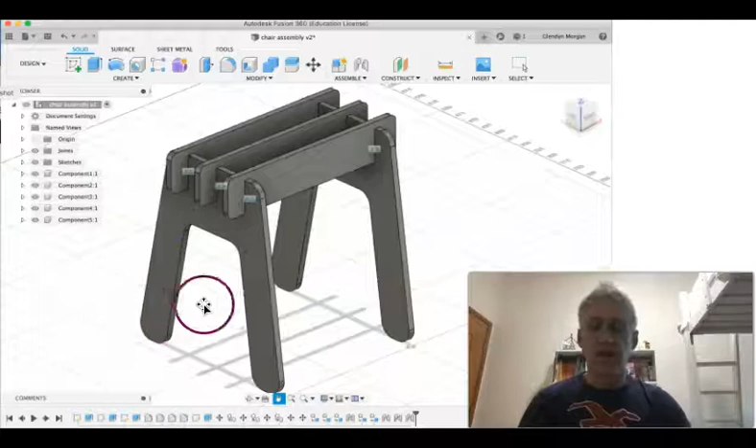I'm going to try and quickly draw a chair similar to this one I've got half made up, but it's an initial sketch. I want to change some things on it, angle the sides in, and change the shape of the top a little. Up here I want to bring that down higher on the sides and lower in the middle to make it more comfortable.

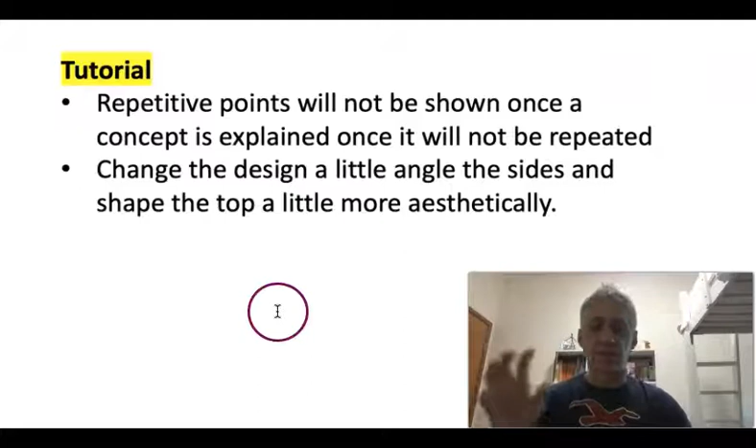The other thing I want to say is that I'll probably skip sections. If there's a repetitive point during this tutorial, I'll do it once, and then you might skip over several parts and see me putting things together, but I'll try to keep the thing short.

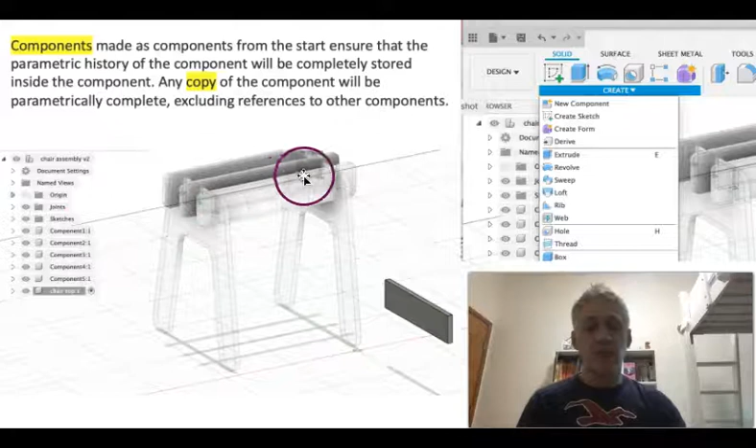One of the things we need to remember when we start, and you can see here, this is in regard to keeping organized: these components here were made by changing bodies, and this is the work tree on the side I'm circling here. These components here were made after I made bodies, then converted that body into a component.

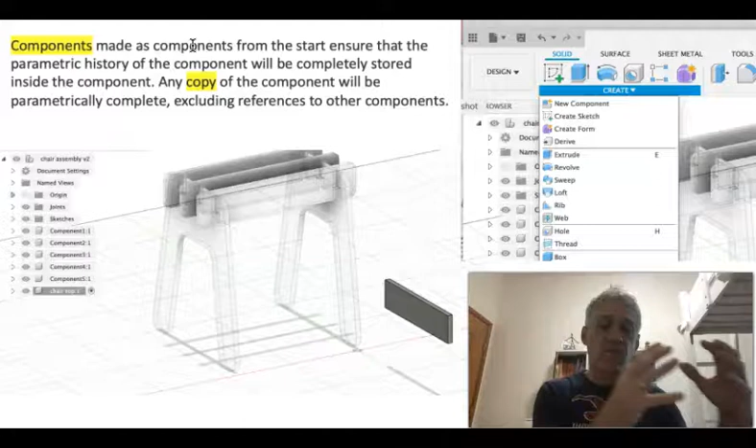If you're going to do an assembly, it's really important that you start with a component, because when you start with a component, it keeps all of the parametric constraints, dimensions and modifications within it. If you make a copy of it, all of those things come with it. If you don't do it that way, and just copy bodies, you lose the history of the drawing.

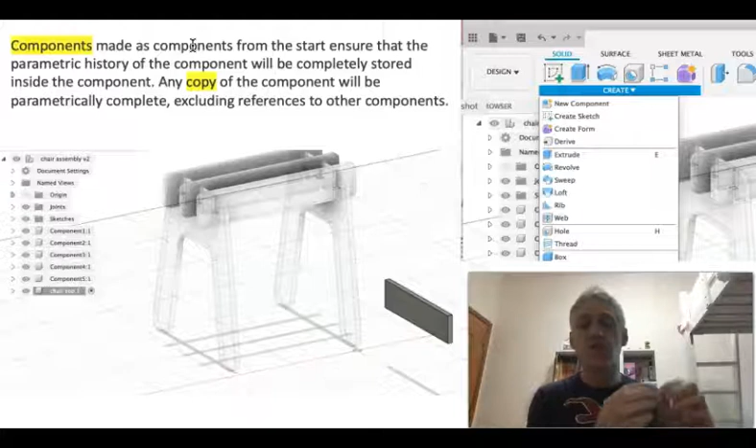The power of 3D parametric drawing, the power of Fusion, Inventor, Revit, all these products, is in the fact that you can go back to a quarter of the way through your drawing and edit parts. So it's important that you start a component, and you can see there I've actually labeled it chair top. If you label things, this tree becomes a really valuable exercise for you.

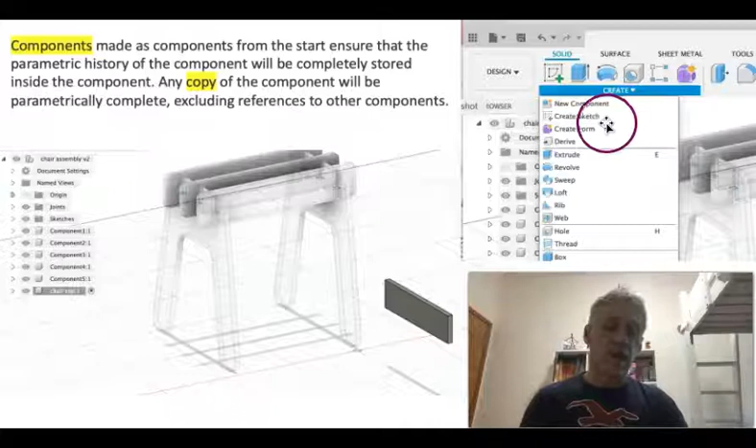So here, when you're creating a part, instead of just creating a normal new sketch, if you create a component, that will bring everything with it when you copy. Okay, so we'll get started.

We'll come up here and start a new design. Then we'll come to create, and create a new component, because we know we want to make several parts. We'll click create component, change the name to chair side, click OK, and then it will appear over here in our document tree.

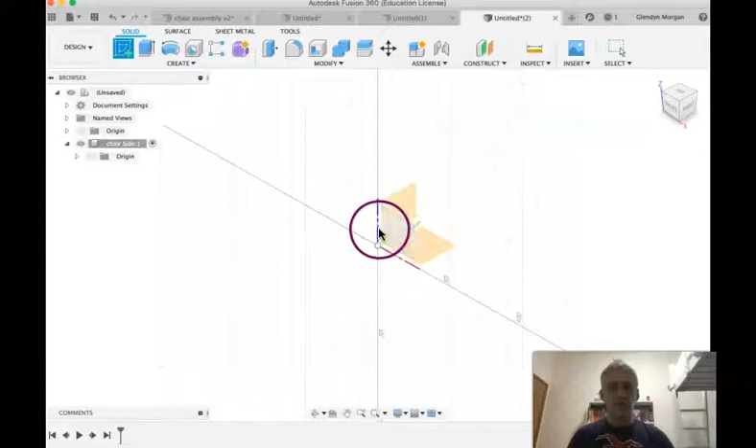Now you can see there's nothing going on in here just yet, which is an important concept, so watch that as we go. What we'll do next is activate that component, then click create a sketch. Now we have to choose which plane we're going to work on. Because it's a side, I'm going to work on a vertical plane, so I'll click on there.

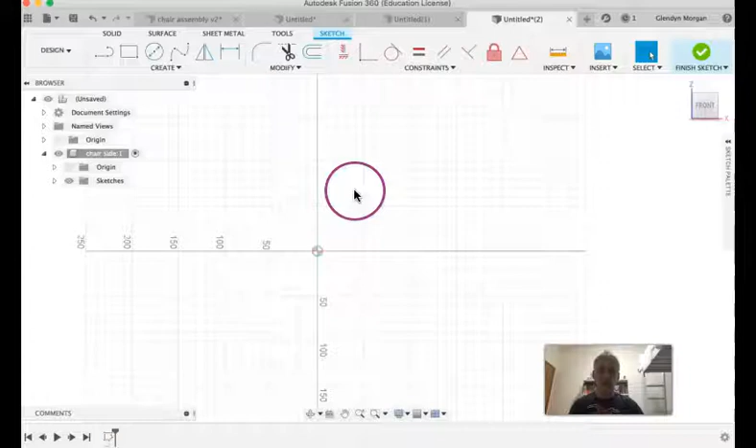It will then spin around in 3D until I'm in a vertical plane, and then I can go ahead and start drawing. I'm just going to zoom in and out here by moving my mouse up and down, and I'd really recommend you use a mouse when drawing rather than the trackpad. It saves a lot of time and effort, and is a lot more accurate.

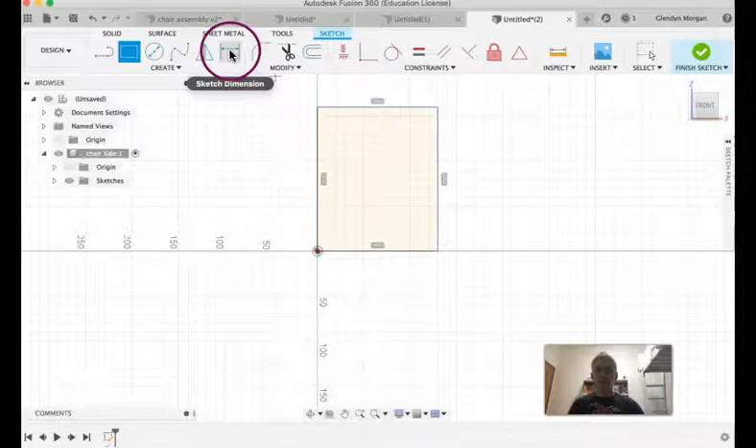So we'll go up here and do a rectangle, and for the first sketch, I'm always inclined, from my Inventor days, to start from the origin, because then I know where I am in 3D space. I've drawn a rectangle here, then I come up to sketch dimension and put a dimension on there, and this is where the dimensions drive the drawing. I'm going to make this thing 280 high.

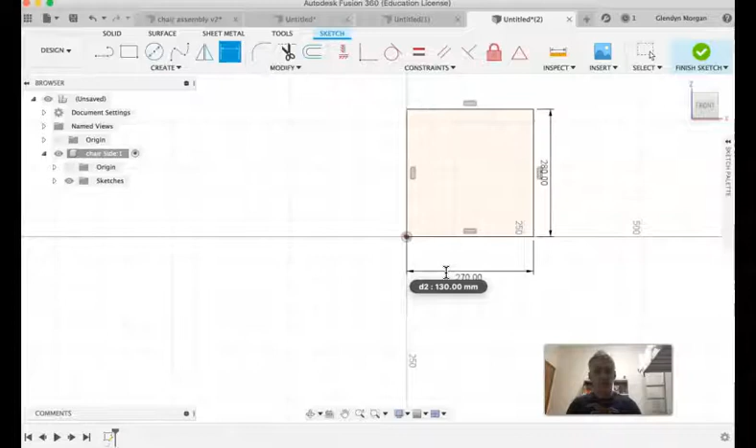You can see I've zoomed out of my space, and then I'm going to put another sketch dimension down the bottom here, and make it 270 wide, because I want a fairly angled chair.

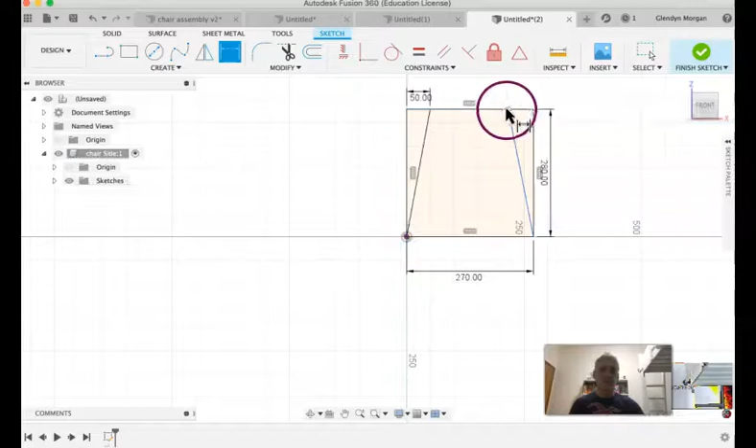The next thing I'm going to do is draw a line, and I'm not going to worry too much, remember I told you just work roughly. I'm going to draw 2 lines down from here to here, then dimension from this point to this point, and type in 50. If it doesn't come up, double click on it, 50, and hit enter.

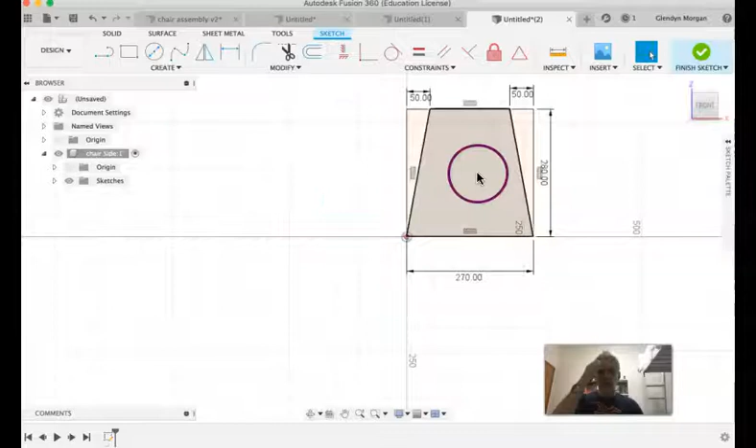Now we're going to lose those dimensions in a minute, but that will do for the moment. Next I've got to make choices here, whether I extrude this shape now, delete the parts around it, bring it up, and then play around and do another sketch.

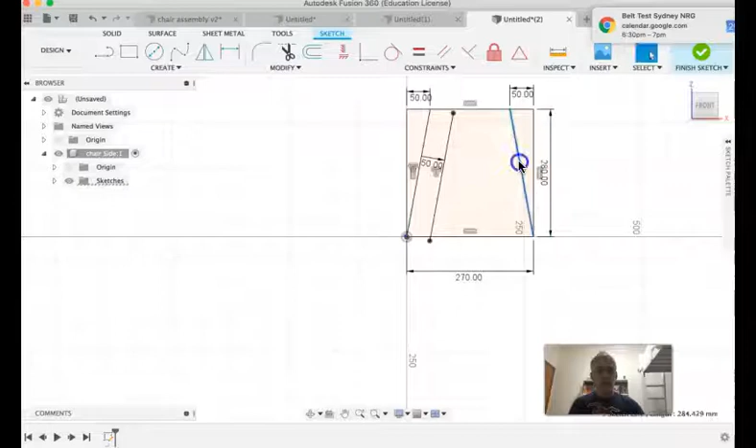I might actually do an offset right now, so I'll grab this line here, drag it down there, and type in 50. I'll do the same thing on this side, but I've got to click offset again. I'll drag that in there, type in 50 again, and click offset.

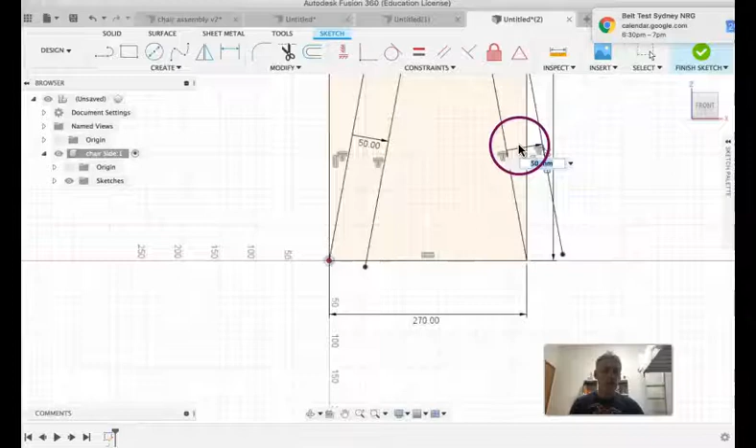The last one I'll do, I've gone outside there, haven't I? Did you see my mistake there? I need to double click on that, sorry, I'll pause. Okay, I came back in here and double clicked on the actual offset dimension, and this one, because I'm dragging it in, it's going to be minus 50, I think. That'll take it back inside. So remember in CAD, you can go minus and you can go positive.

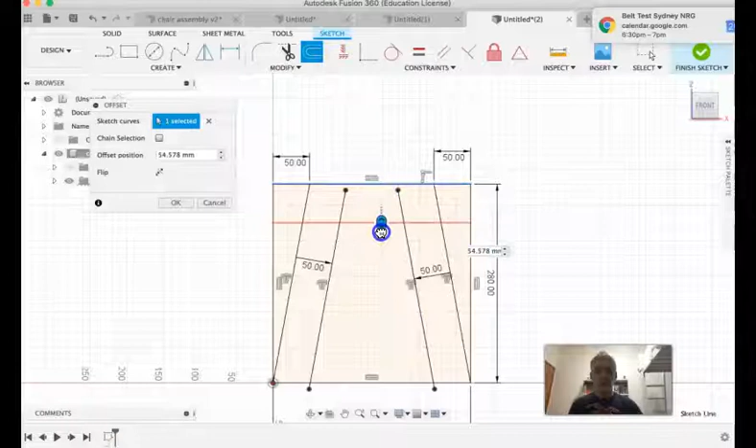So then we've got the toolbars down the bottom here, so we can pan that down a bit. I'm going to do one more offset before I'm finished, this one, and drag it down here. This time I want it to be decent and strong at the top, so I'm going to make it 100 there. Hit enter and finished.

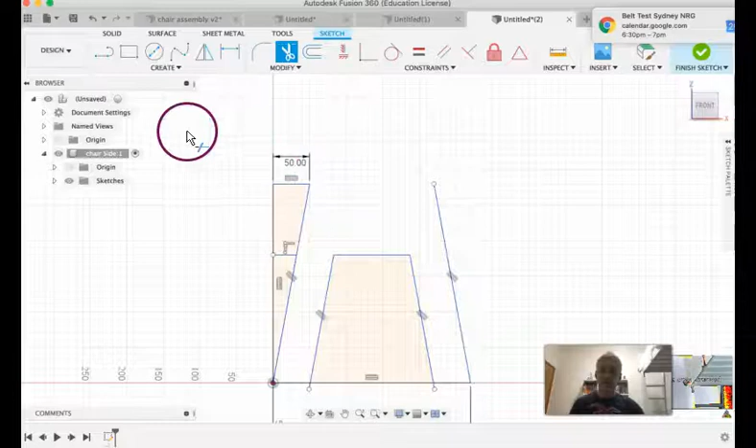Next I'm going to trim this up a bit so I've got my chair parts in here. I'll cut these outside ones as well, and delete all of that. Now here's a mistake, so let's undo that and get rid of some parts. I've got to make sure I'm on modify, scissors, the trim command, and then I can trim all these things out of the way. I'll cut that out of the way too so it's ready to go.

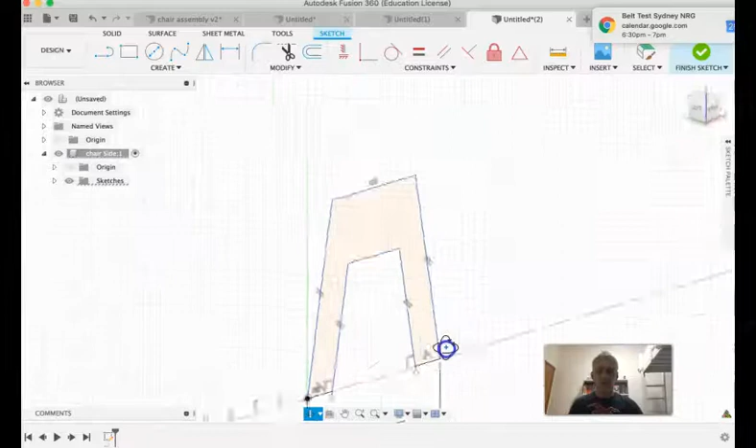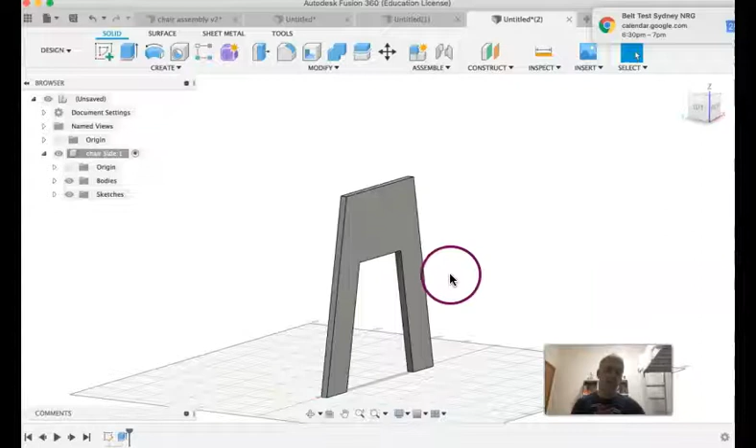Now I can whip myself over into some sort of 3D space so I can see which way I'm going to extrude, and then go finish sketch. We've always got to finish the sketch, then I click finish sketch, right click on that, do a press pull, and drag my thing this way. I'm going to type in, oh it's negative, so I'll go -9 because I know I want to make this out of 9mm plywood.

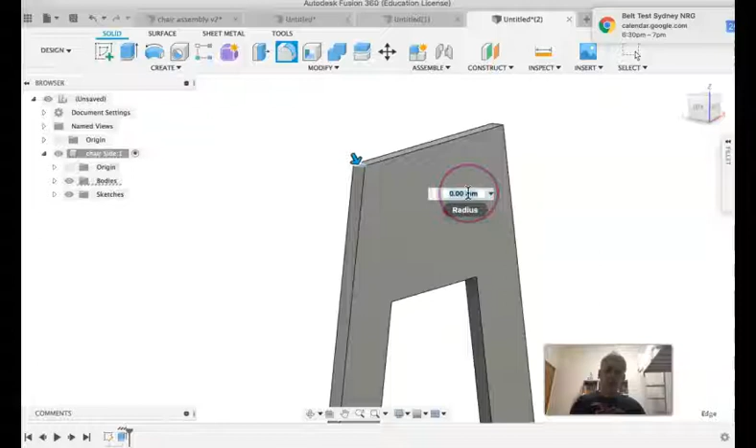Then I'm going to come in here and start using my 3D tools. I could have done some fillets around here before, but in Fusion it's actually a good idea to do them later. So in here I'm going to pick the fillet command, pick the edge I want to fillet, and type in there. I'm going to make them pretty big, a 20mm fillet, hit enter, and it's going to do it.

Sometimes you need to rotate around so you can see these edges. I'm going to click back on fillet again, click on that edge carefully. It doesn't remember, which is a pain, so I'll do that again. In Inventor, I think it used to remember.

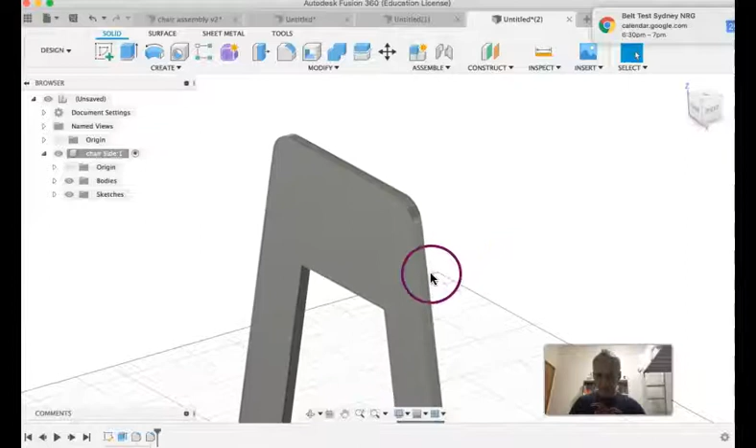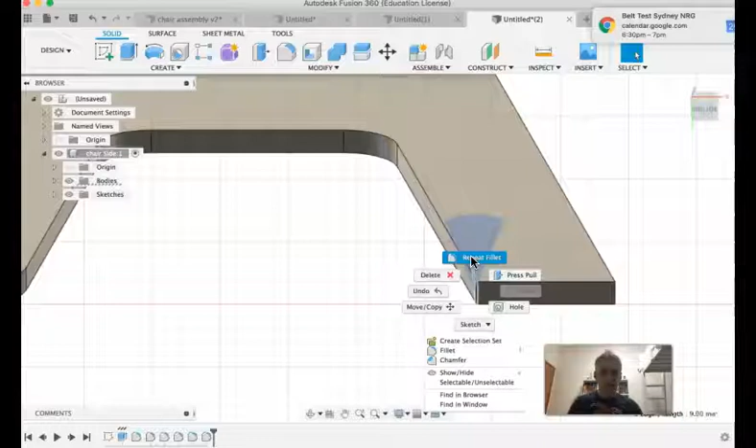It pays to move things around before you do this, so I've moved this around now so I can catch most of these in one go. I've got to keep coming back here, clicking on those edges, typing in 20, and fillet it. Another thing you can do is pick the feature and then click fillet, or right click and go repeat fillet. Or I can pick that one, hold down shift, pick this one, right click, go repeat fillet, and then I get to do 2 fillets at once.

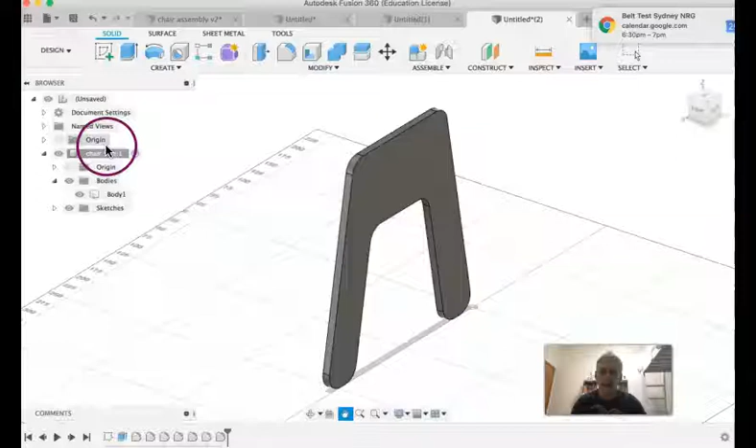Okay, so there's most of my first part. I've got to put some slots in the top now, and then I can copy it. Over here I've got now some bodies underneath my component, which is what I was mentioning at the start. It's really important the way you start this, and you have to think before you start.